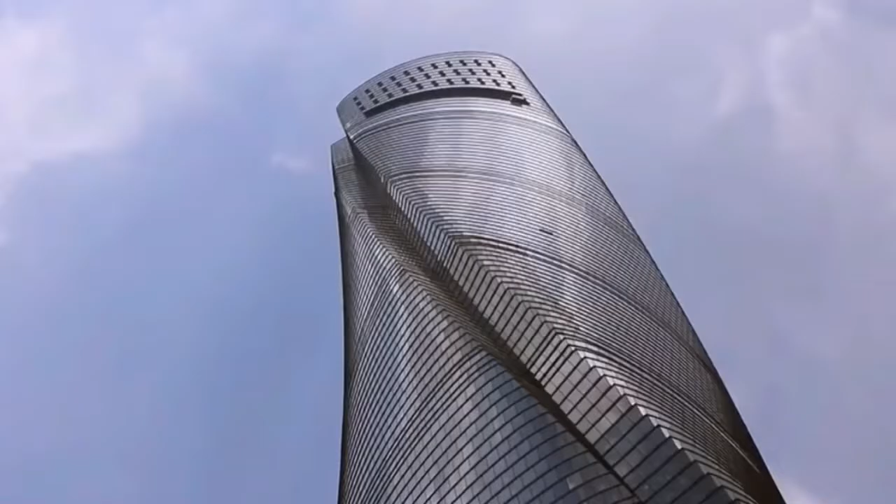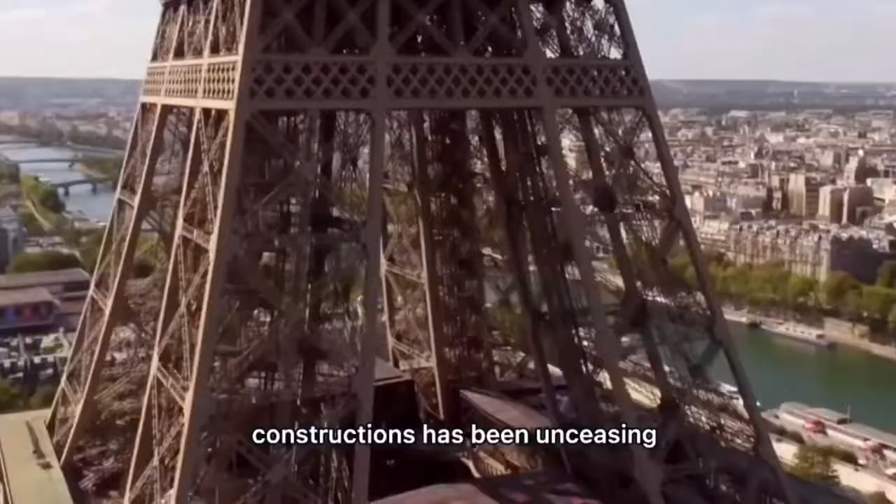Today, the world has 3 mega skyscrapers, reaching over 600 meters - a physical representation of man's eternal desire to conquer the sky.

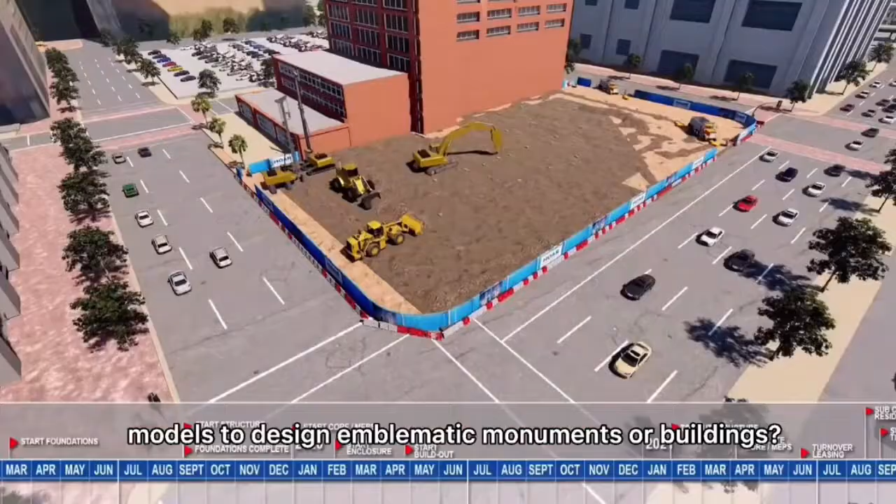From the Tower of Babel to the Burj Khalifa in Dubai, the creation of high-rise building construction has been unceasing. What are the methods used to build high-rise buildings? What materials of superstructure are used? How did engineers make use of specific models to design emblematic monuments or buildings?

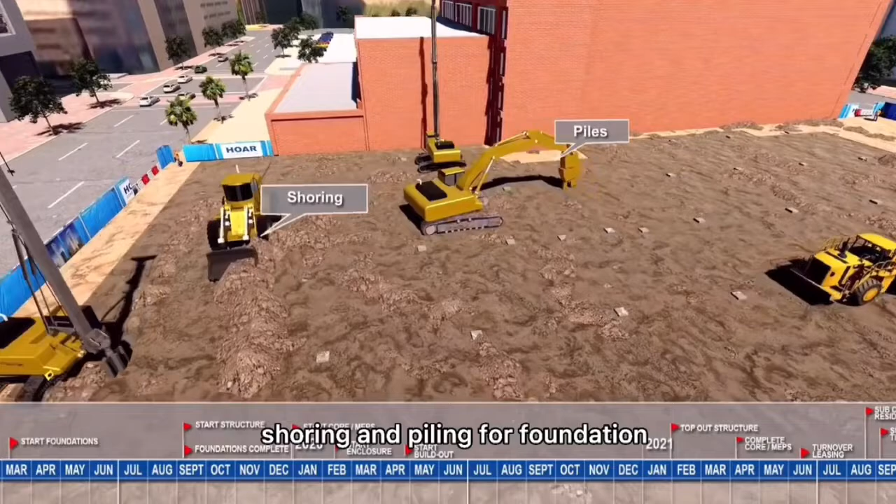This is the construction planning and process of superstructure construction. As you can see, it starts from substructure works, which is excavated, shoring and piling for foundation.

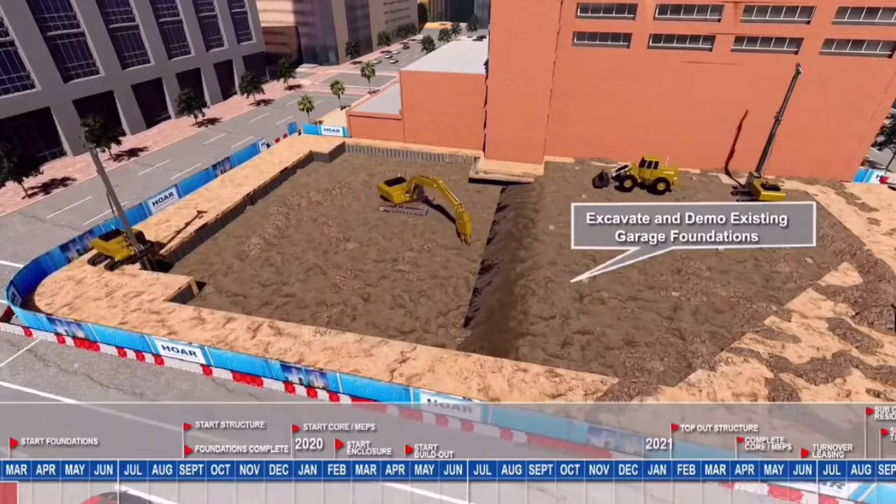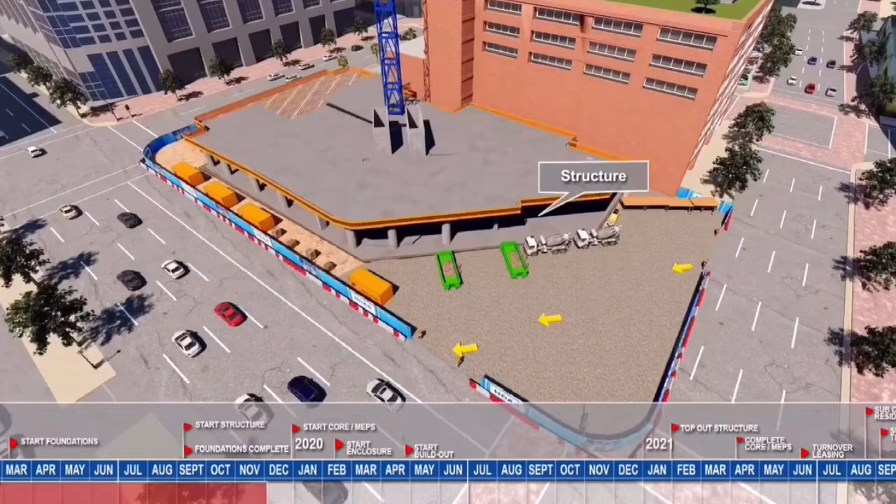After that, the construction will start with the superstructures. For this building, they use a precast concrete system, which was installed and followed with window installation.

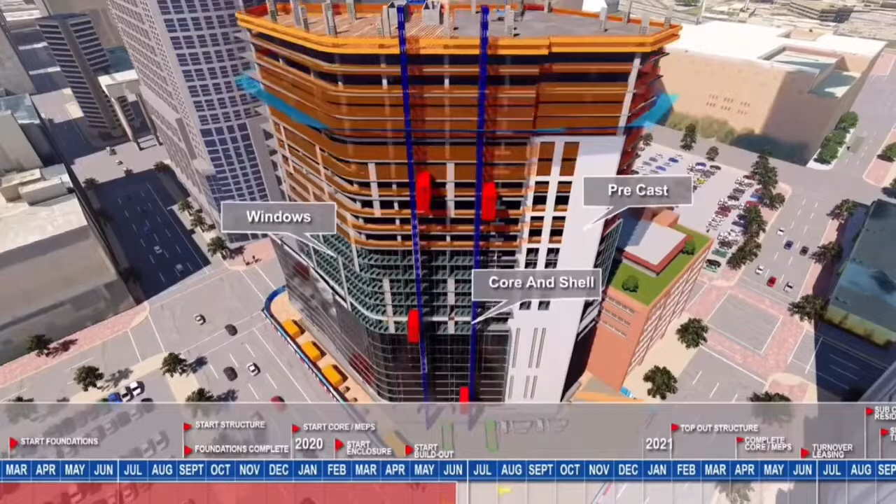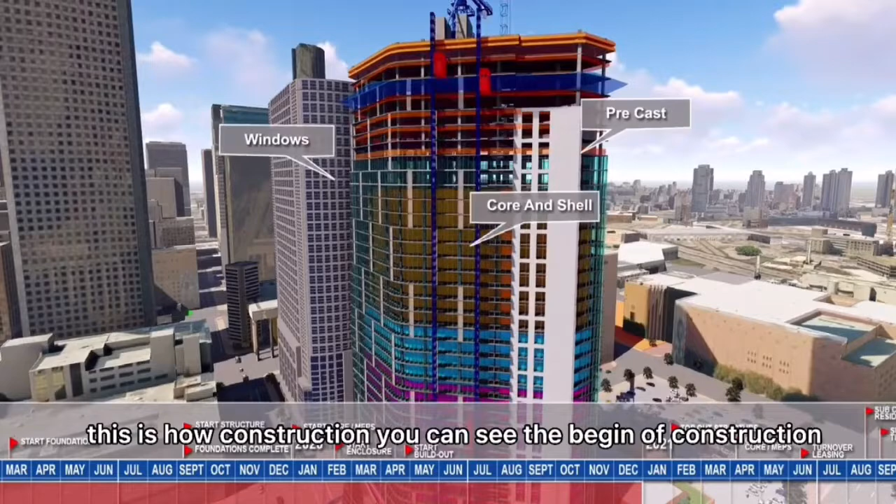Later, we will show you in detail how precast concrete were used in superstructure construction. As you can see, this is how superstructure construction is built from the beginning until the end of the construction.

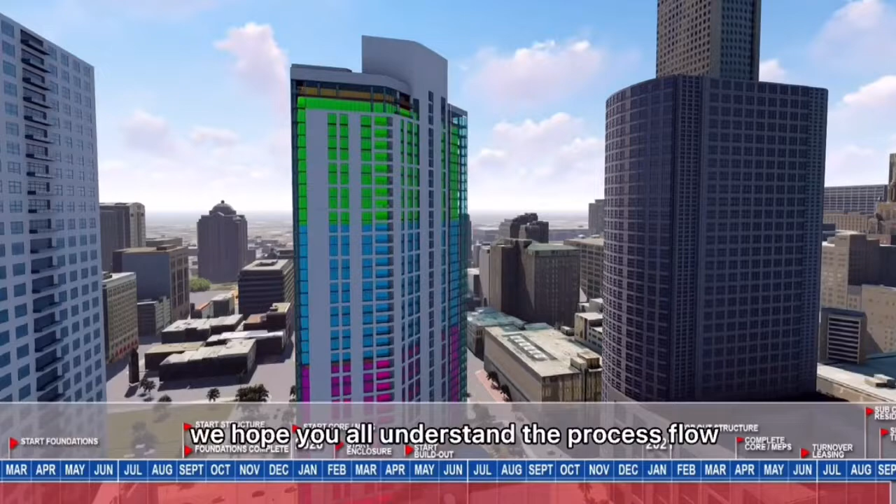Can you see the process flow of superstructure construction? We hope you understand all the process flow for building this superstructure construction.

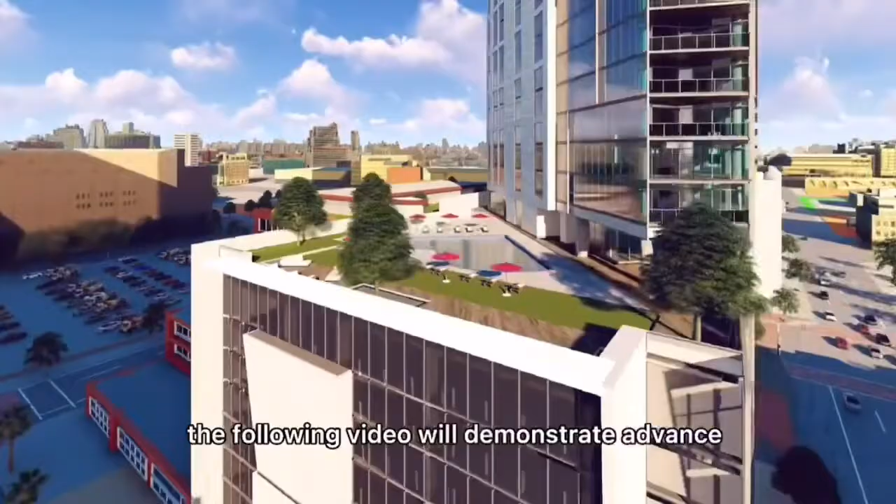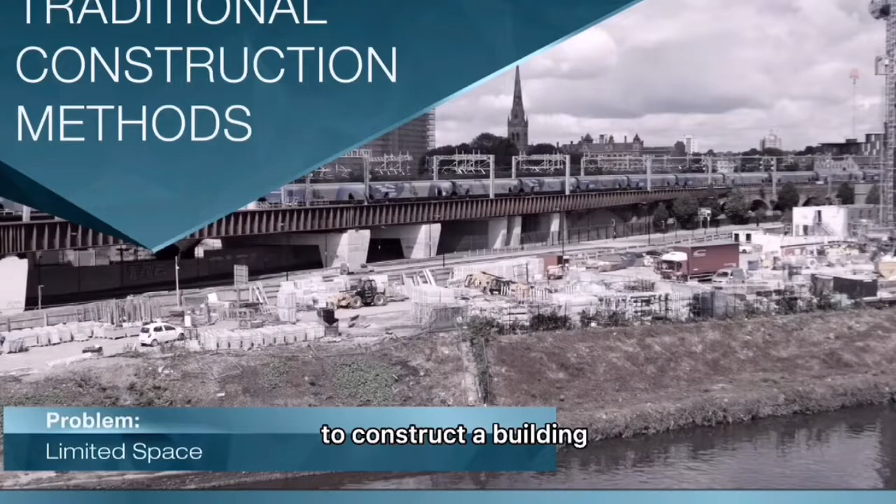The following video will demonstrate advanced modern method of construction, specifically precast reinforced concrete. With more traditional methods of construction, building would require a lot of space surrounding the site to store material and for construction vehicles to work and move around the site.

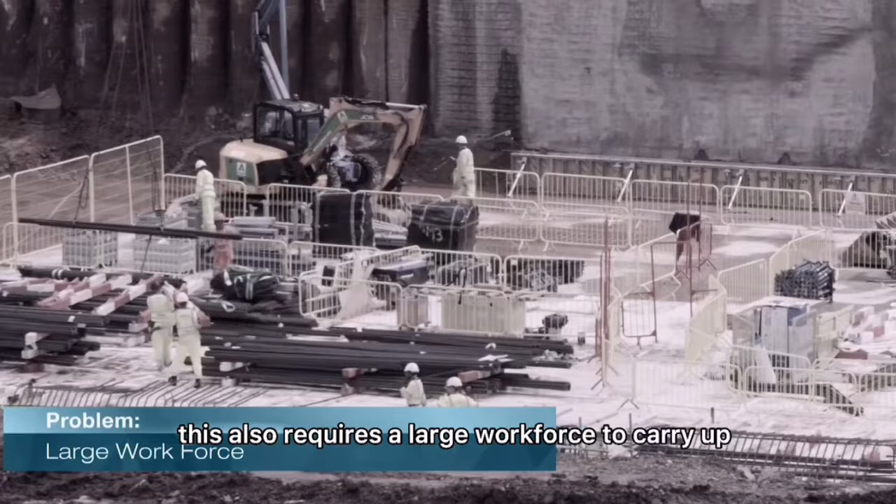Traditional construction takes a very long time, creates a lot of noise and disturbance for surrounding populations, and creates an excessive amount of waste. It also requires a large workforce to carry out various skilled trades, and coupled with the well-publicized skill shortage, poses huge challenges to the budget and delivery of new building projects.

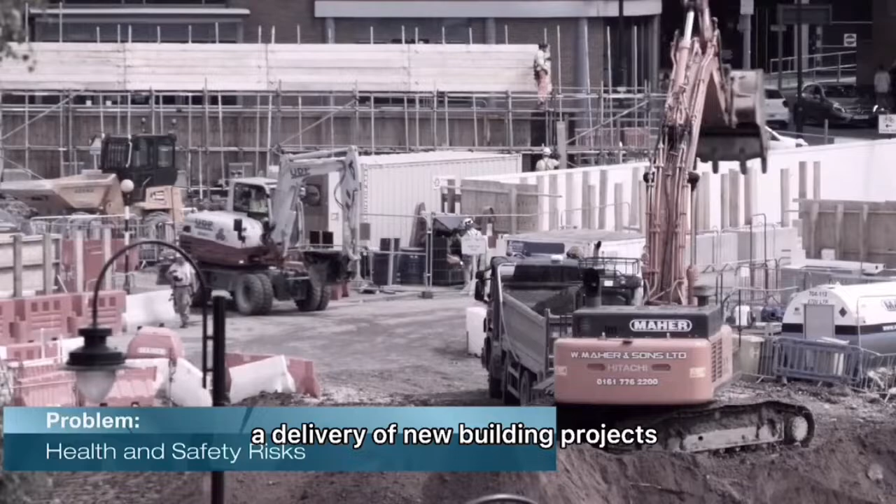Having a large workforce on site also carries greater risk to health and safety. When considering more traditional methods, increased temporary work is required compared to off-site methods.

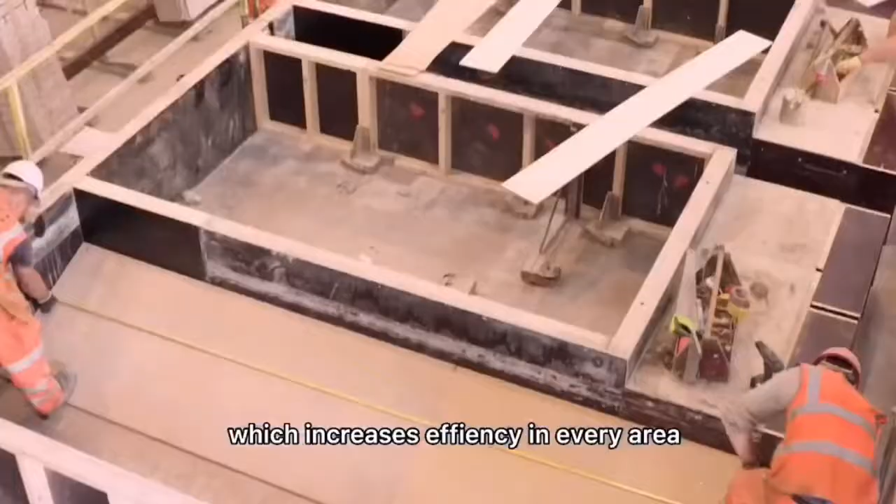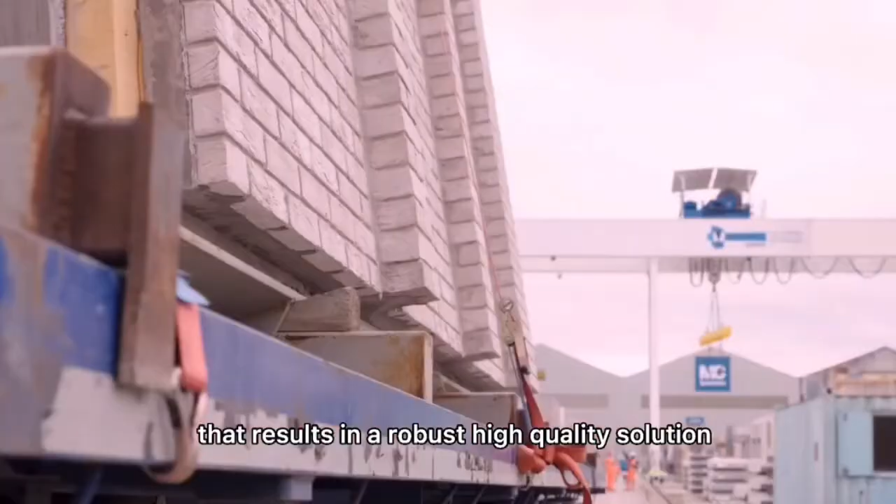Today, modern methods of construction have advanced greatly, particularly precast concrete, which increases efficiency in every area. The building components are constructed off-site in a factory environment with a quality control process that results in a robust, high-quality solution. These components are then delivered to site on a just-in-time basis, then lifted directly off the vehicles and installed into their final location.

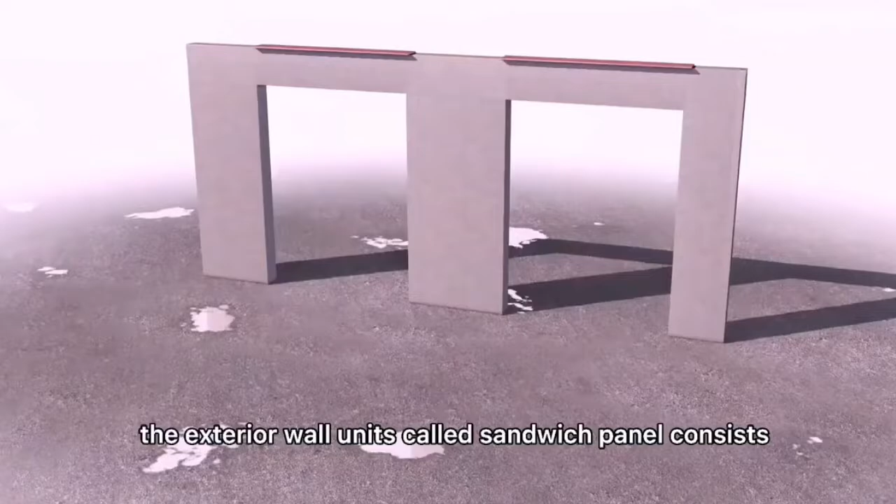The exterior wall unit, called a sandwich panel, consists of a structural inner leaf, an insulating layer, and a pre-finished outer leaf. The outer leaf is connected to and supported by the inner leaf.

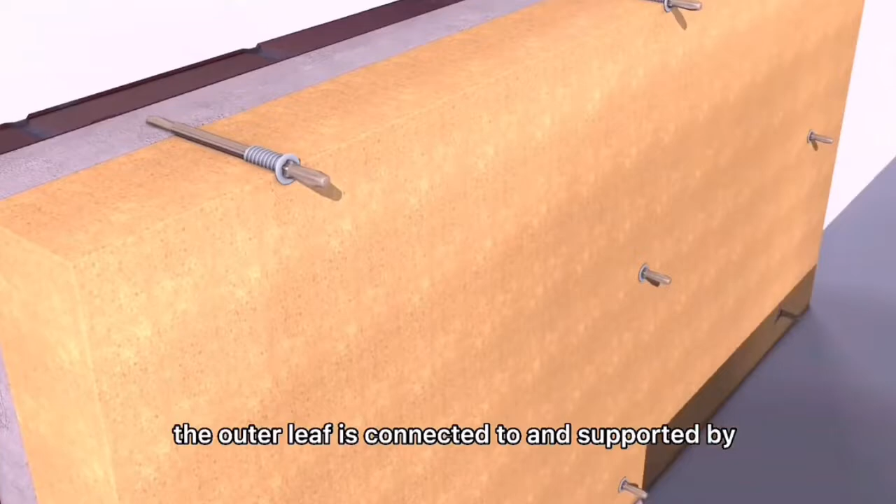Using proprietary plastic ties sandwiching the insulating layer in between, the sandwich panel provides a ready-made exterior with a variety of finishes and an interior surface ready for direct decoration.

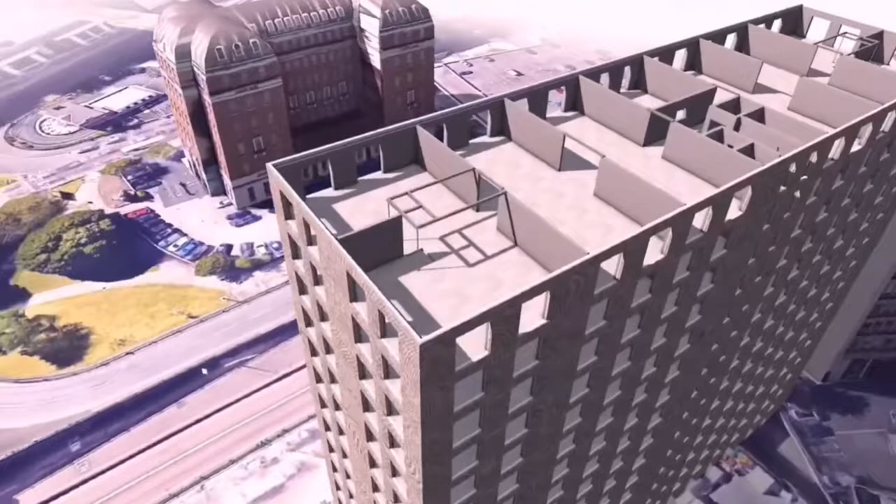They come pre-fitted with doors, windows, conduits, and are among the most fire-resistant build methods available due to the insulation being totally encased by the wall, floor, and roof slab. Installation is clever but simple, satisfying the approved documents of building regulation.

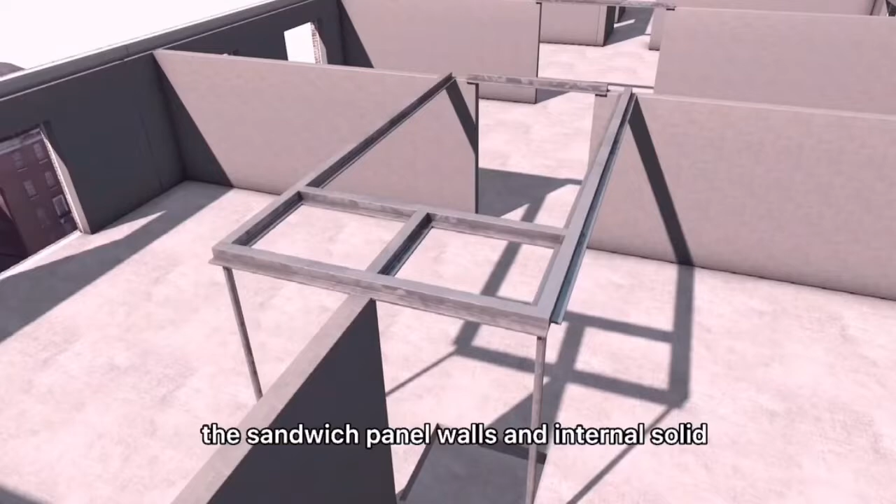Sandwich panel walls and internal solid walls have continuous vertical ties; floors are horizontally tied to support the unit, and then fully grouted to provide a 3D tied structure placed on top.

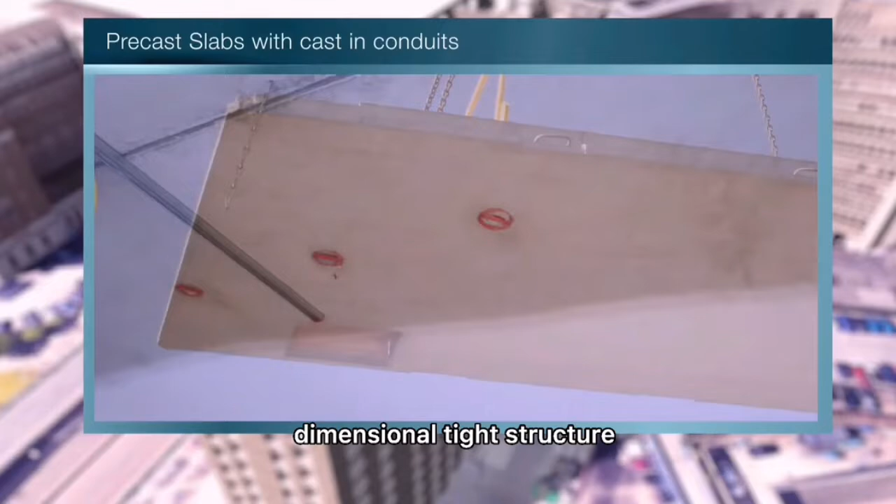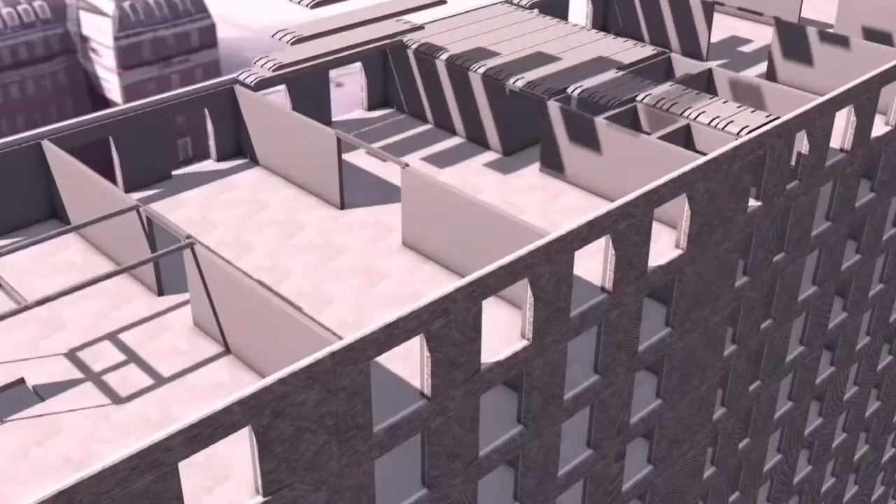These are precast slabs that cover an entire room. They can have cast-in conduit for lighting and recesses for bathroom pods. Alternatively, hollow core precast concrete planks are used for longer spanning areas.

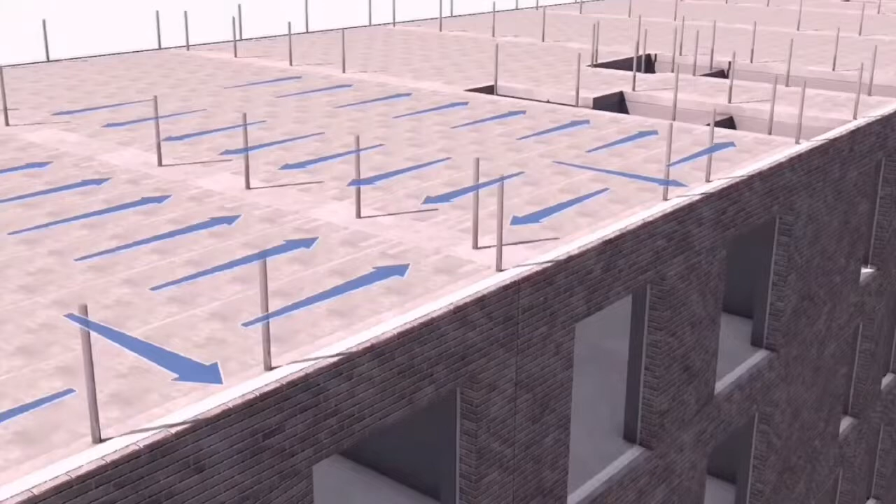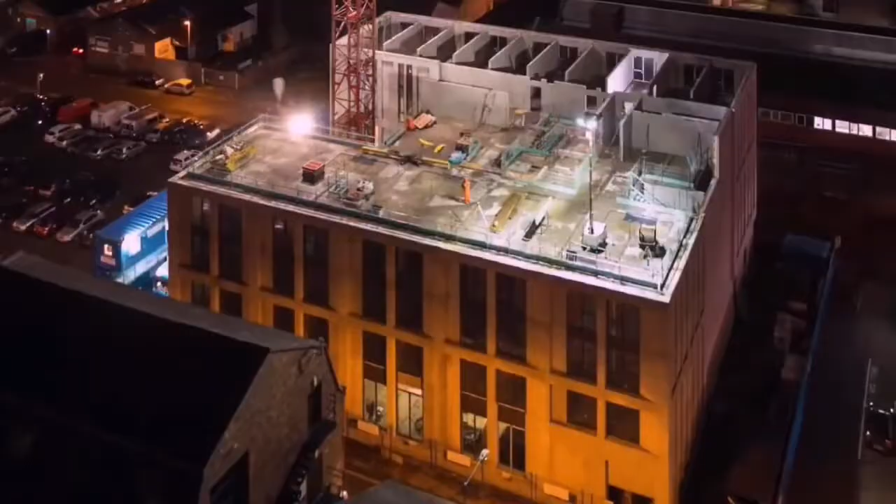These flooring units are lifted onto their final bearing directly from the delivery vehicle. The units do not require any temporary propping, and once grouted, they act as a diaphragm which transfers the lateral force to the cross wall, which subsequently transfers this force down to the foundation.

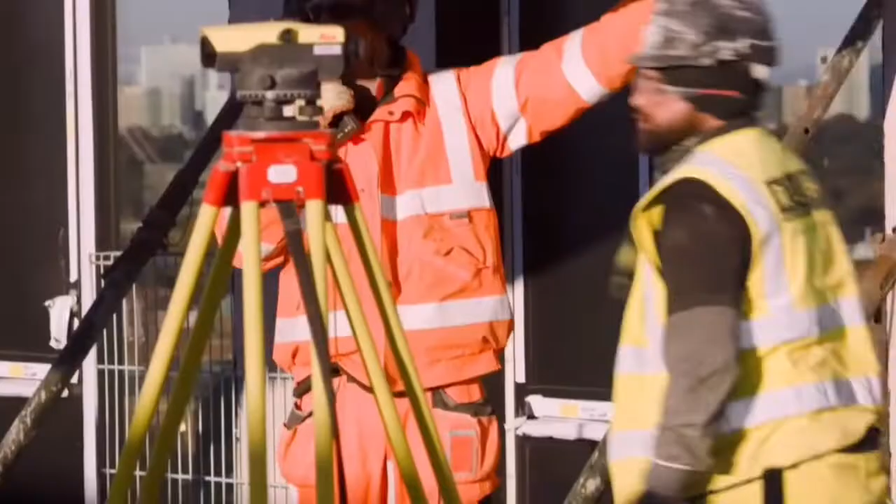Only a small crew is needed, which also greatly benefits health and safety. And with follow-on trades, the building can also be constructed in tight urban areas with very little noise pollution.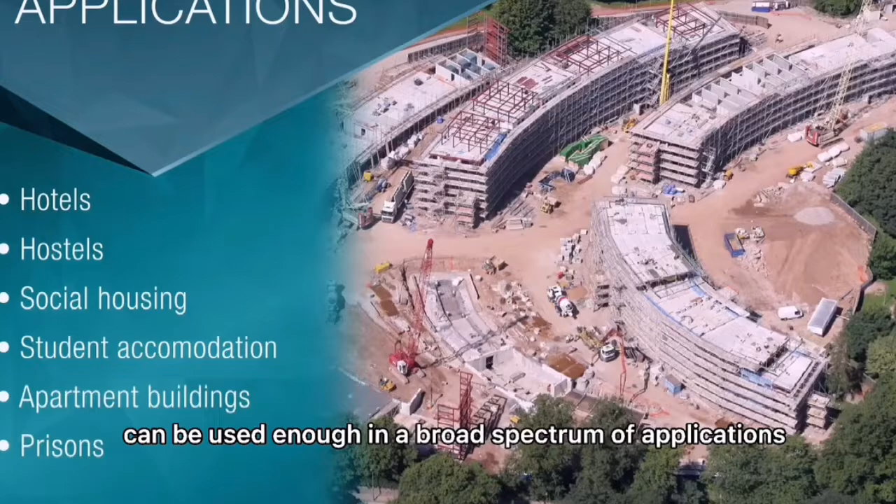The versatility of this off-site solution means precast concrete construction can be used in a broad spectrum of applications, such as hotels, hostels, social housing, student accommodation, apartment buildings, and prisons.

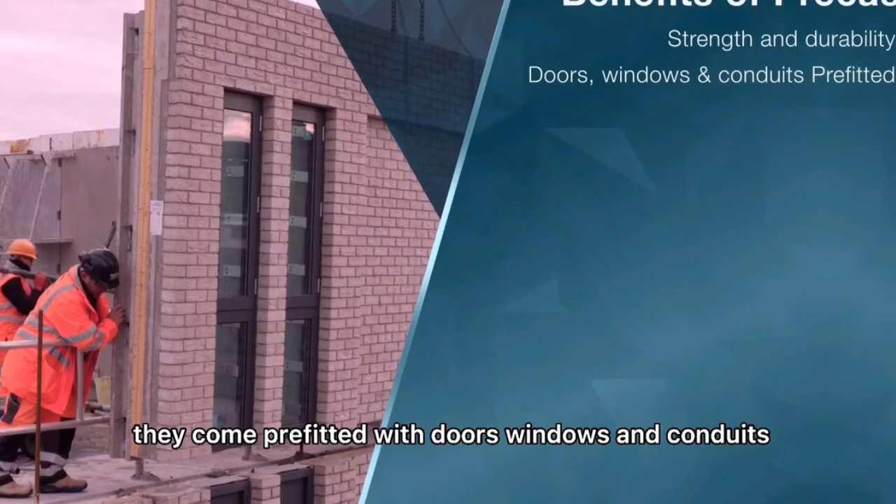There are other modern methods of construction, but they lack the benefits of precast concrete. Precast reinforced concrete units have strength and durability.

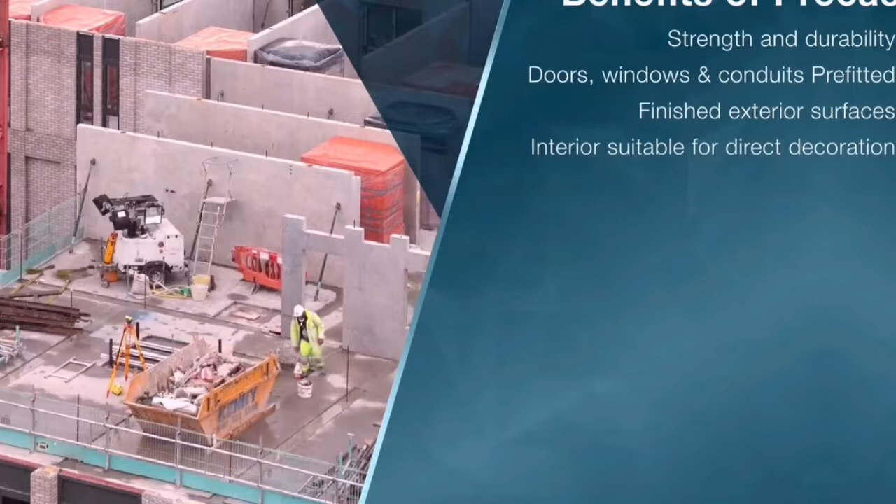They come pre-fitted with doors, windows, and conduits for services. The units also have a finished exterior and interior surface, suitable for direct decoration, which eliminates the need for dry-lined walls and suspended ceilings.

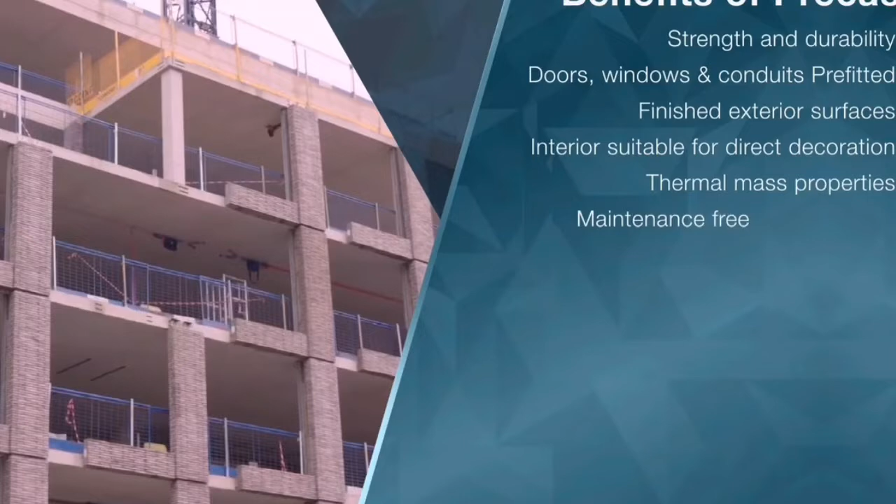The thermal mass properties of the exposed concrete enable it to absorb, store, and later radiate heat. Daytime temperature can be reduced by up to 5 degrees.

Precast reinforced concrete is inherently fire resistant, eliminating the need for site-applied fire protection and subsequent maintenance. Precast components are rapidly installed, with units delivered as they are needed, allowing follow-on trades access to the building much sooner.

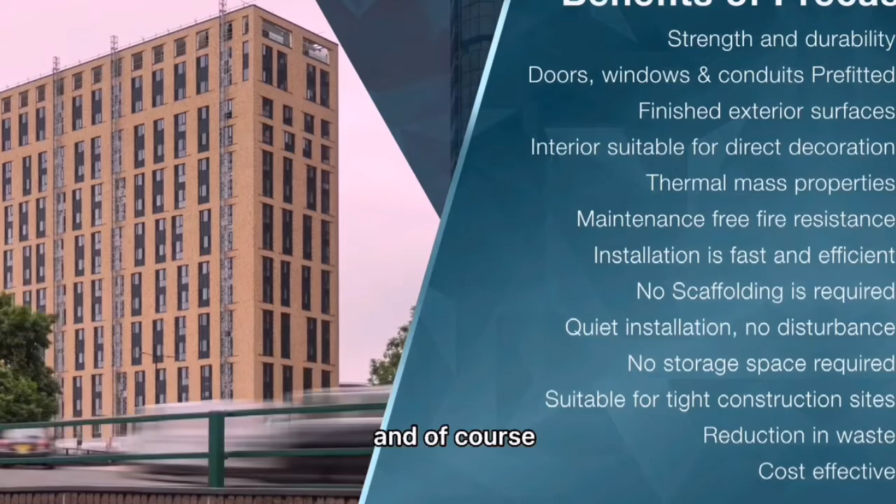Construction safety professionals have rewarding careers that allow them to work with people and influence leaders on construction sites throughout the world. The new stadium, power plant, bridge, or high-rise built in your area had a safety professional on the job to keep workers and the public safe during construction.

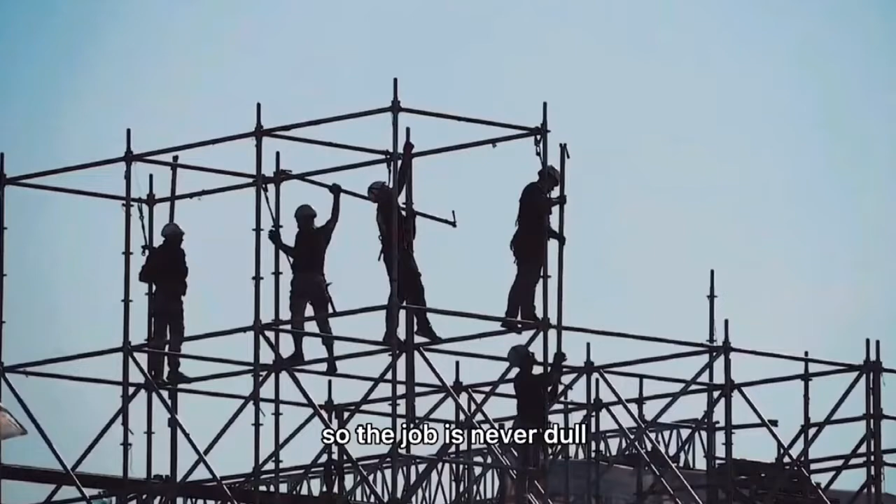Workers use heavy equipment like excavators and cranes, work at different heights, and use electricity to get the job done. One of the most challenging parts of working in construction is that the workplace is always changing; by the end of each shift, job sites can be dangerous as they are being built.

What does a construction safety professional do on a day-to-day basis? Typically, construction safety professionals will start their day with a safety briefing at the plan of the day meeting. The leadership sets out the priorities and projects that need to be completed.

Construction safety professional duties could include performing job site inspections or walk-arounds to ensure there are no hazards posing immediate threats to workers, and giving worker safety training to perform job tasks or for compliance purposes. Training can cover many topics, like how to keep workers safe while working at heights, with electricity, or scaffolding and more.

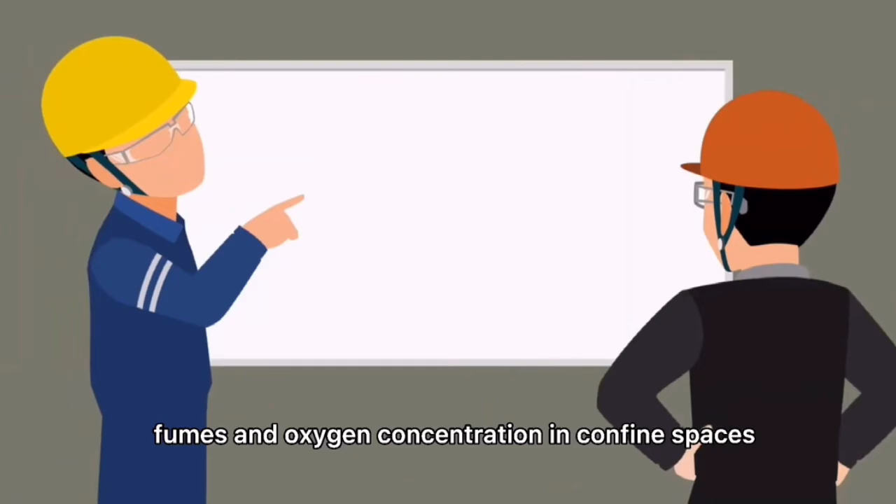Working with other team members to plan high-risk work and eliminate hazards, performing industrial hygiene sampling like testing for welding fumes and oxygen concentration in confined spaces, and presenting new programs, ideas, or needs to leadership and the workforce. The safety professional's main job is to create a safe and healthy working environment.